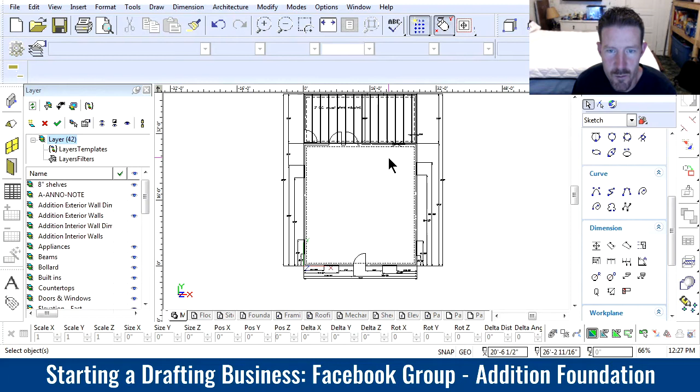All right, so we're here. We just did the foundation, and I talked about this detail. With the house, the way it exists, we need to put a stem wall for the house all the way around it, so when we move the house, it can sit on that new stem wall. The house looks like it's made of 2x6 floor joists, and we're going to put 2x10s on our addition. So we need two stem walls at the joint where the house meets the addition, and the stem wall for the addition is going to be shorter than the stem wall for the house. So I need to do a detail to show that.

So here is a detail I used on a different project, and it shows the stem wall for the house and the details of the floor joist. This will work for both the addition and the current house, except for that joint between the two. I need to put another stem wall here for the house, and maybe this is the house right here. I need to put a new stem wall for the addition, showing that. So what I'm going to do in this video is draw the detail for that.

First we're going to get the copy function, and I'm just going to copy this over so I can start working on it over here. Now I got all the stuff I need. Now all these labels, I'm going to get them out of the way, and I'll probably use them later. Notice I turned off my copy function. Let's slide them up here. Hopefully we can use those later.

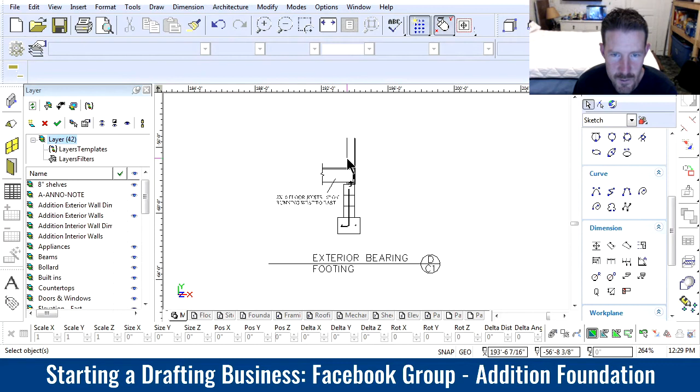Alright, so I'm going to assume that this is the house, because the house is already existing, and we're going to use that wall as part of the interior for the next thing. Now this right here, we're going to get rid of this. This is siding from the old project. What did I do? I tried to click delete, it didn't work.

Oh, come on now. Maybe it did work, I just can't see it.

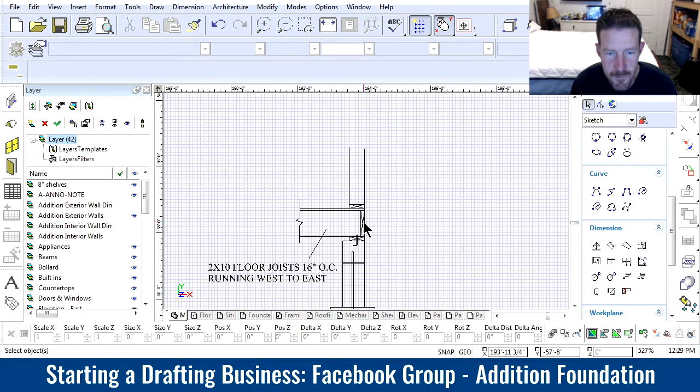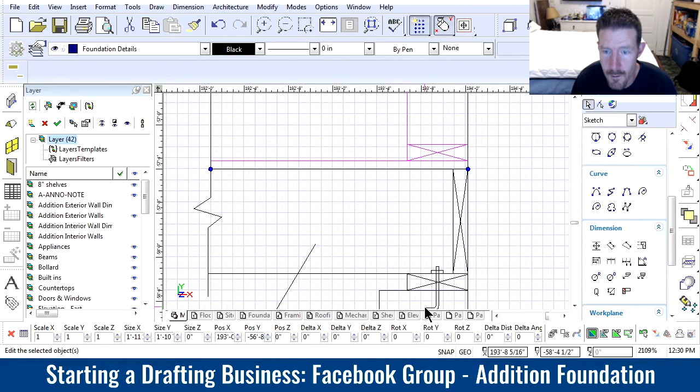Okay, now this is 2x10, we need to shrink that down. So I'm going to grab the top of this and move it down. 2x6 to 2x10, that's 4 inches, so let's just move that down 4 inches. Alright, now we take our band here and shrink that down.

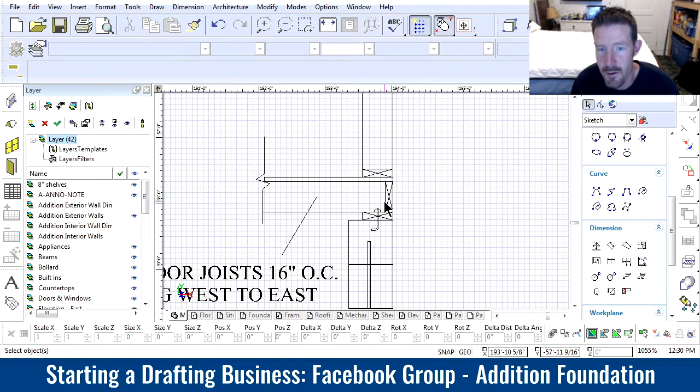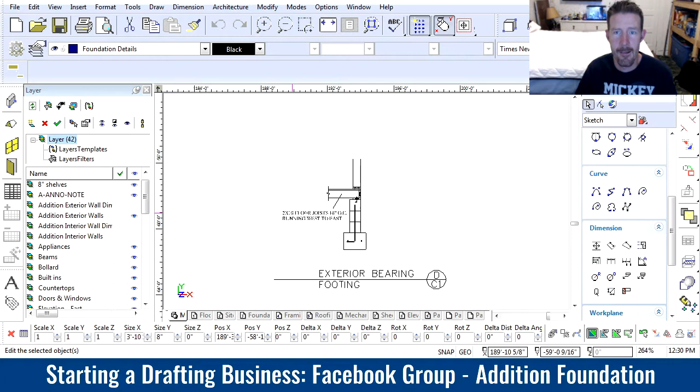This label is going to change to 2x6, and then I'm going to put existing. I want to change that, capitals. Existing. Looks like there's 16 on center. Maybe I should do that. Interesting, 16 on center.

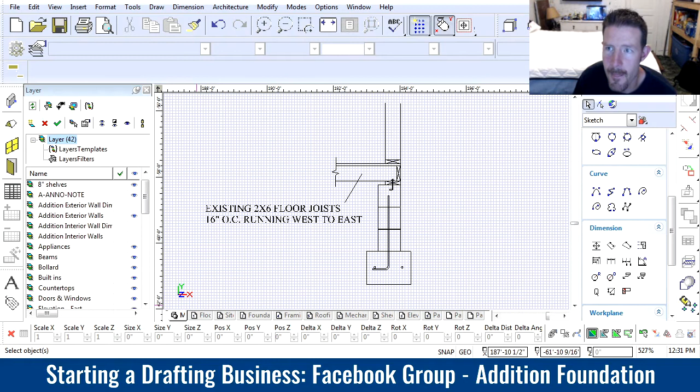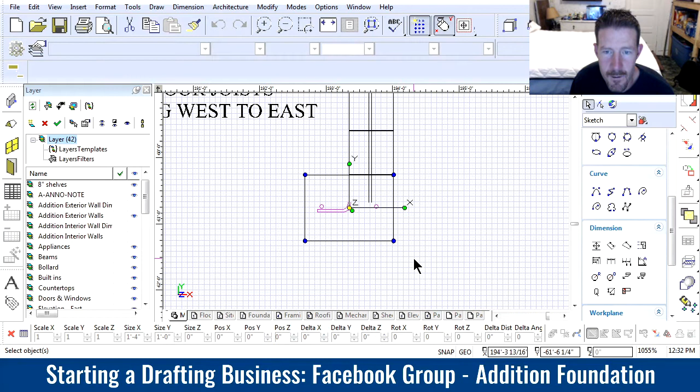All right, so now what we're going to do is copy this over. I'm actually going to slide this over too. Let's see, like this. Really? Gotta be like that, huh? Alright, so we got that. That's the rebar.

Okay, so now we're going to put another one right here next to it, a little bit shorter. So let's see, how much of this do I want? I think I'm just going to take all of this and copy it. I'm going to rotate it on the Y-axis right here, 180 degrees, see what that looks like. Rotate Y, 180. Okay, take off the copy function.

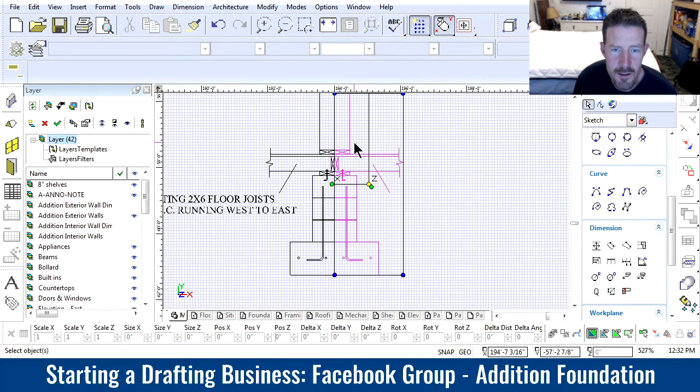Now let's slide it across, try to match it up. Okay, so that's the idea. Except here, we're not going to have this on the addition. Okay, is there an extra line in here? What is this? Get rid of that.

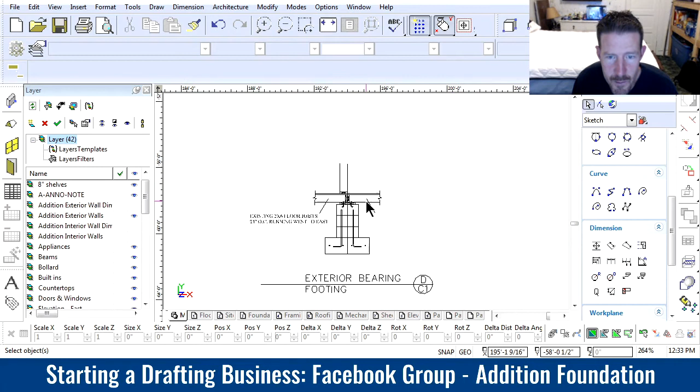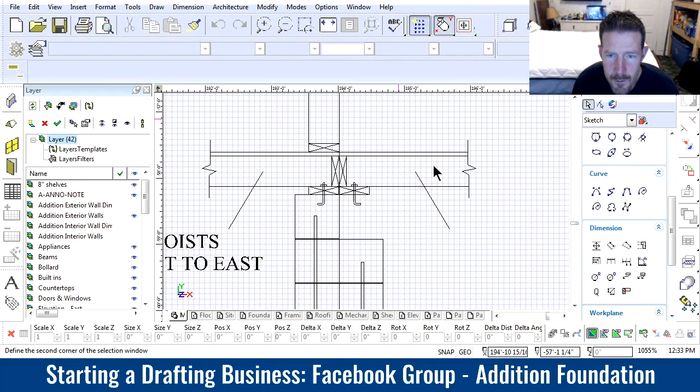Alright, so this makes sense. So this is going to be 2 by 10s though. So we need to take this brick out, shrink this down. There we go. Down in here, then this whole thing here. Oh, too much, this whole thing. I'm actually going to leave it there.

What's going on with these bricks? How big are they? 1, 2, 3, 4, 5, 6, 7, 8. 8-inch bricks.

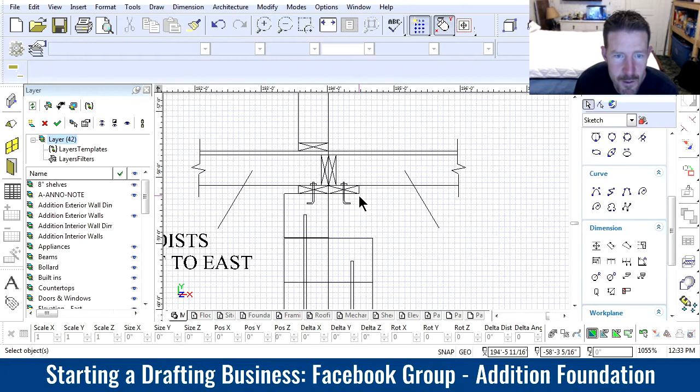That makes sense. Alright, so how are we going to do this? We're going to have to slide this up 3 inches. Delta Y, 3. Then we're going to slide this part down 5 inches.

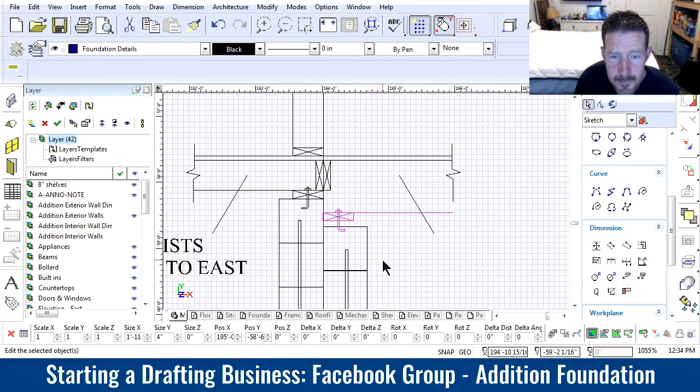2 by 6 to 2 by 10, I think that's going to be 4 inches. Alright, so that means this stuff goes up further, 1 more inch it looks like.

Oh, excuse me. 1.1. Oh, 1.1 was too much. Negative 0.1, that's too much. 0.08, that's closer. 0.01, aha. Gotcha.

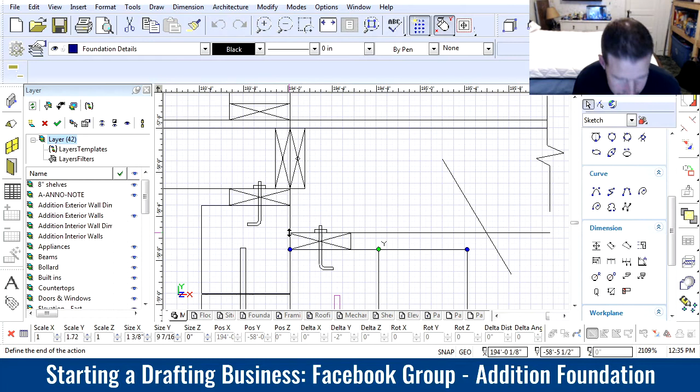Alright, so then this thing again is a 2 by 10, comes down to here. Alright, this looks good. Looking good.

Copy your label over. There we go. Take the existing out. There we go. Floor joist, 24 inches on center. And they're running north to south.

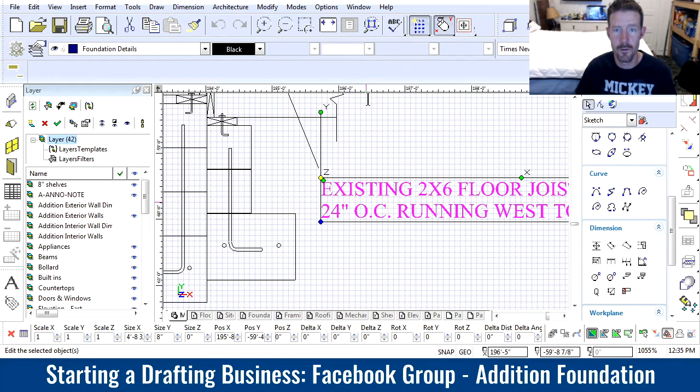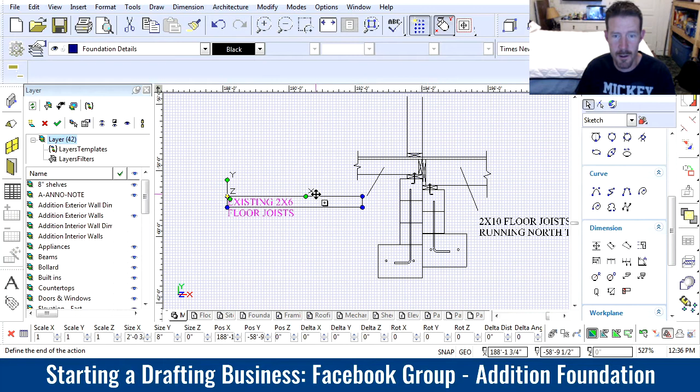Okay, good. Alright, I'm going to change this too, because I'm going to change this existing. Yeah, I'm just going to leave this part off. Existing 2 by 6 floor joists. We don't know how they're running, we don't know how far they are apart. So we're going to put what we do know there.

Okay, how are we going to do this? These are 8-inch blocks. Is this correct? This is a 12-inch footer. Yep, 12-inch footer. So from here to here, let's try that again. Here to here, 4 inches.

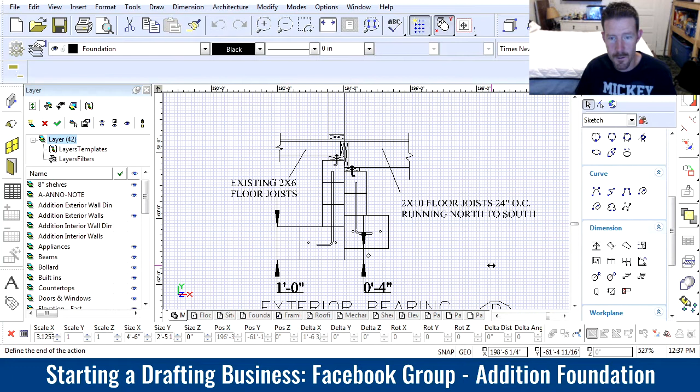Let's see. Why is that crooked? Oh, I see, that's interesting. Doesn't take much. Alright, delta x 0.1.

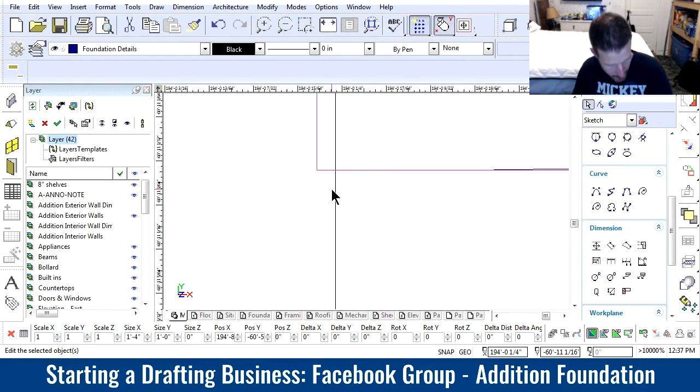Way too far. 0.005. I went up, that's funny. Delta y, 0.005. 0.001, getting closer. 0.001, too far. Negative 0.001. Okay, 0.005, perfect.

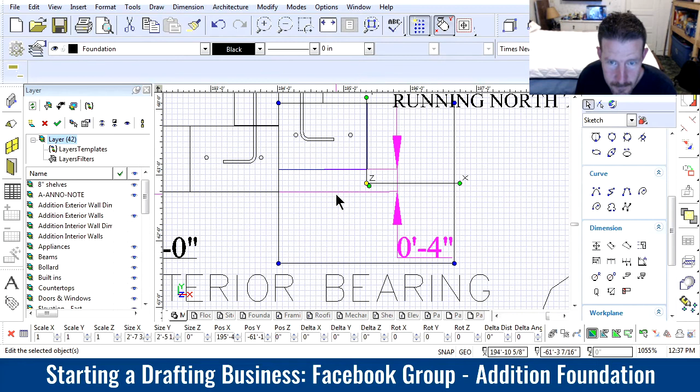Alright, now this whole thing here. Try that one more time. That's better.

So start that 4 inches higher. Take a... let's get ourselves a skilled foundation guy, he can do this right. Yep, that's good.

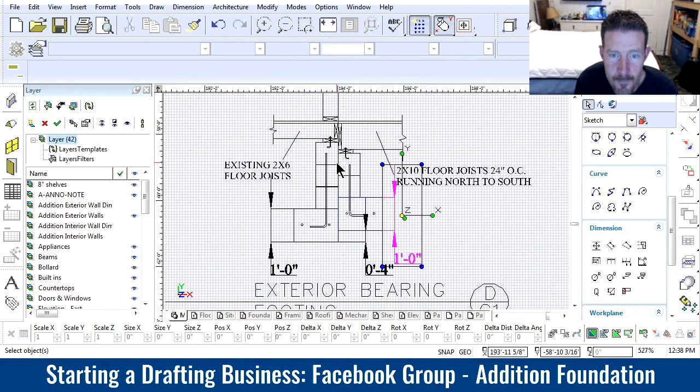Alright, so now if for some reason the addition or the existing home doesn't have this sill plate, then they can add it, and then this will be the right height. Now if for some reason the back by the kitchen is 2 by 10, then they can make this a 2 by 12 or 2 by 14 to get up there.

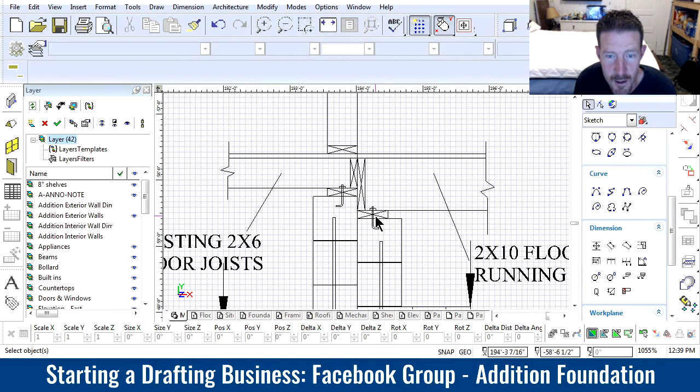They could also add an additional sill plate, maybe, if it's to code. I don't know what the code is, I don't know if you can get away with that. That way this extra 4 inches basically is going to help us get some space to make sure we get this right. I just can't believe they used 2 by 6.

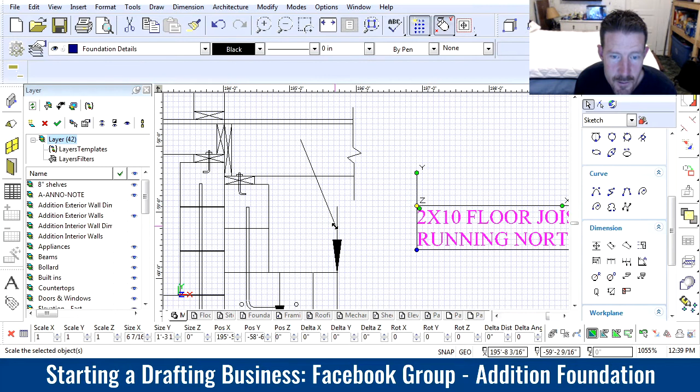It's crazy. Makes sense, old buildings do weird stuff. A lot of times they're not to code, or at least not up to current code. So this is pretty much what the detail is going to look like for moving the house and then the addition. So what do we got here?

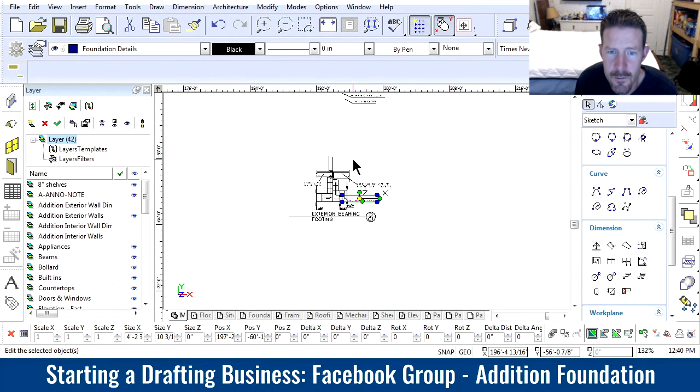Okay, continuous rebar, let's put this label on. Let's see, right here. There we go, it's this one. 16 inches by 12 inches deep footer. That's right here.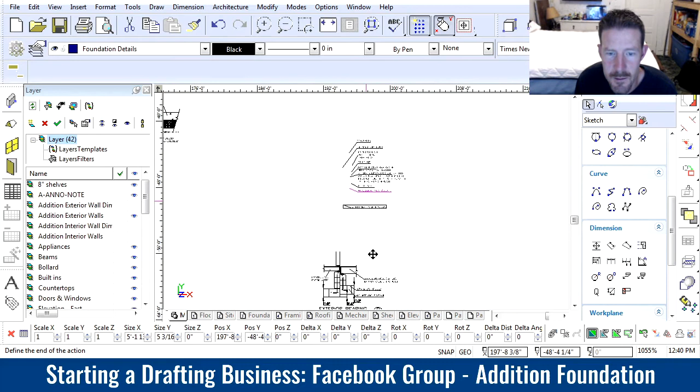What's this one? The vertical rebar. That's this one here. Oh boy, it's getting messy. Let's see if we can sneak that in here. Oh, come on.

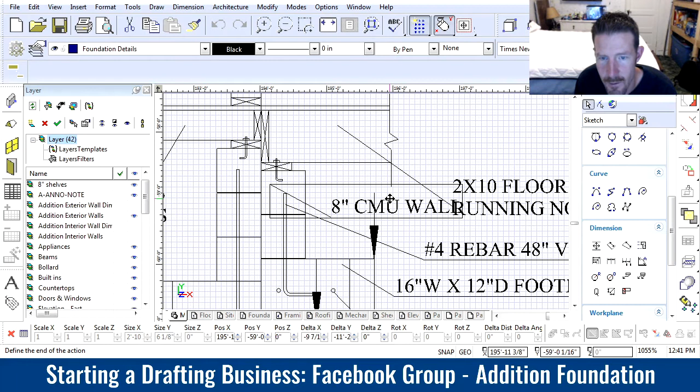There we go. And what's this one? 8-inch CMUs. I can sneak that in here. Not sure where this one is. Make sure this is... I should make sure all this is on the foundation details. Right here. I can do that when I'm done though.

Alright, what's the next one? Alright, the bolts. So this part, actually these parts, the sill plate and the bolts. So let's see if I can get the sill plate and the bolts. Oh, okay, what else is up here?

Alright, they don't show that, okay. That's down here. Tricky. Okay, I think I'm going to move this up. Put this stuff in there. Come on now. Here we go. Right about here.

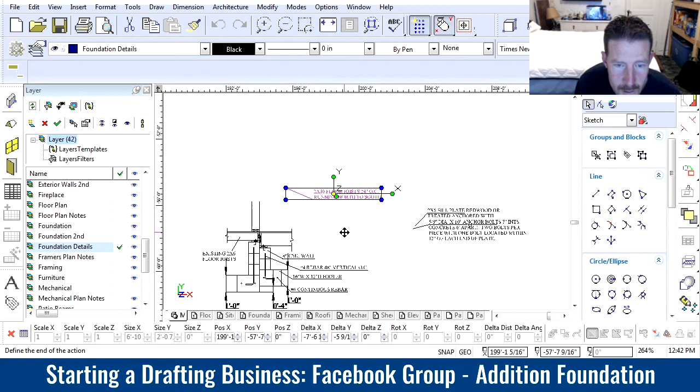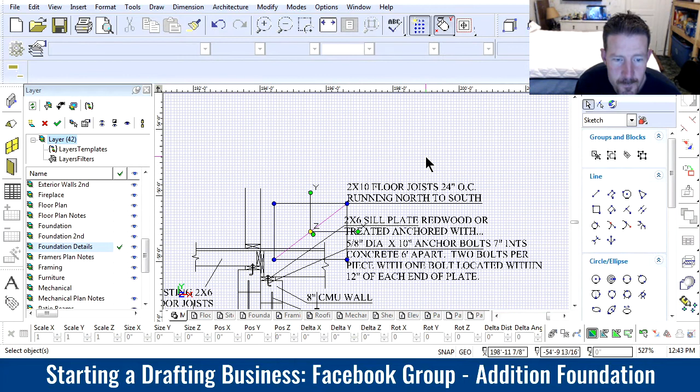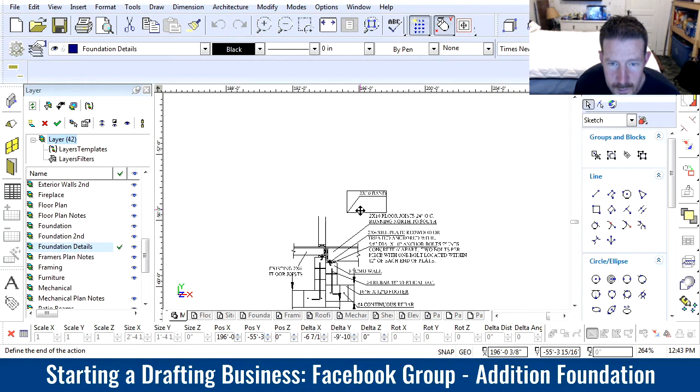This is the bolt. This is the sill plate. Alright, this is the floor joist. It's coming together. 2x10 band. Almost room. There we go.

Exterior sheathing, we're not going to have that. And plywood floor, yeah, we'll have that. So I'll get rid of this. I can put that right here. Except I have to move the band a little bit.

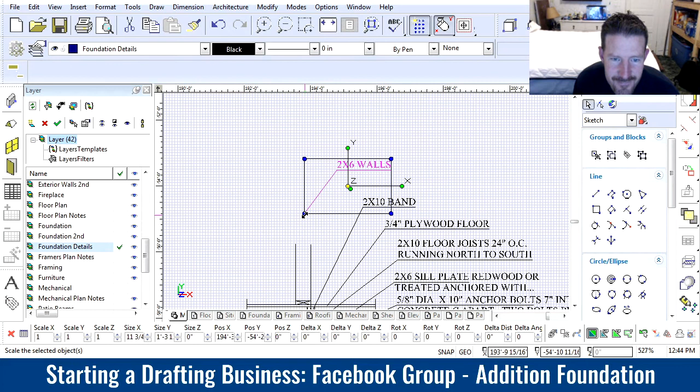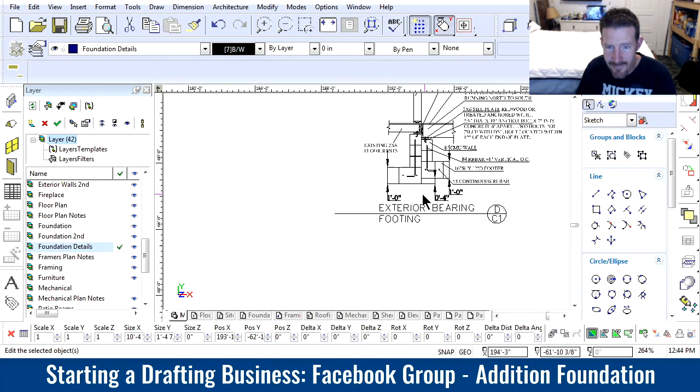We're going to put existing here. Existing 2x4 walls. Move that down a little bit. Okay, I'm going to make sure all of this is on the foundation details, just like that. Alright, so this is what the stem wall between the two, the addition and the existing, are going to look like.

Alright, now that we've drawn this up, we're going to put a label on the plan to show where it is. So first we need to change this, okay, to a 2 or something, because this is the 1. Let's see if we can find a 2. There's a 3. There's a 6. Well, let's just take this 3 here.

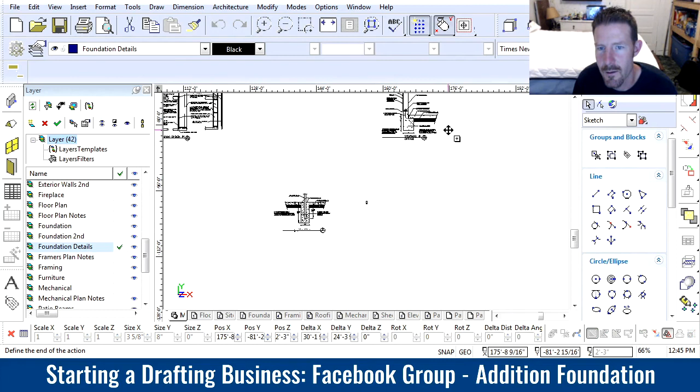No, I don't think so. Let's take this 6 over here. There we go, we'll copy that one. And here we go, make it a 2. And I'm going to change the text style to simplex so it matches the rest of it.

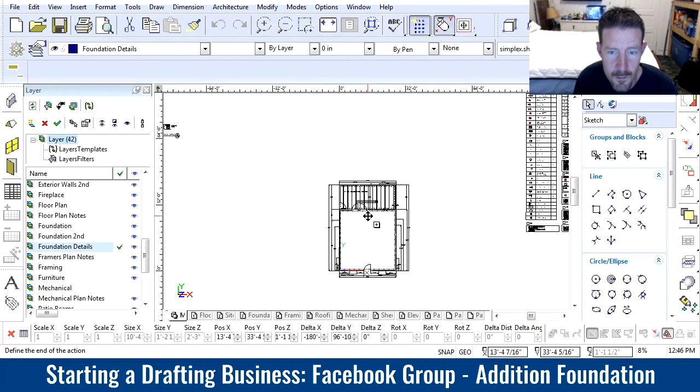This part here then I'm going to copy to the plan. There we go. This part here we're going to change, rotate Z 90 degrees. Hey, what in the world? Don't do that, it's got the circle as part of it. Okay, so let's go to our explode tool, that'll remove the circle.

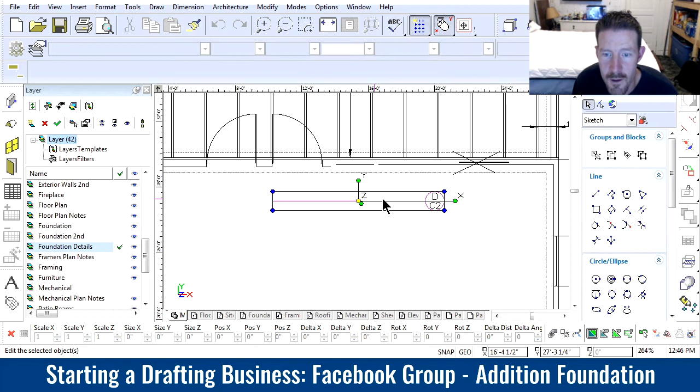Not yet, let's try again. Keep exploding it, eventually it'll give you just pieces. Apparently lots of pieces. Lots and lots of pieces. I wonder why it made so many. Alright, so we can just get rid of this stuff. Oh, come on computer, work with me here, work with me.

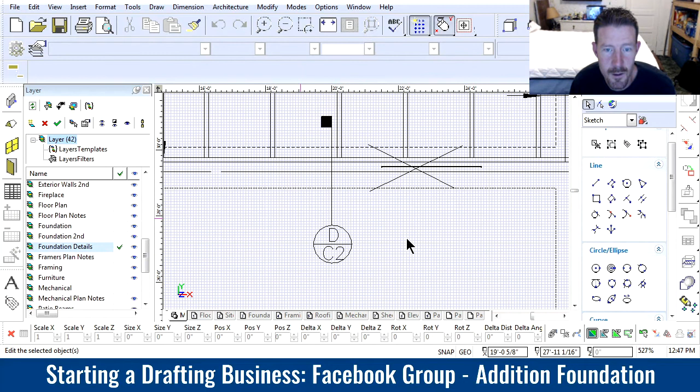Foundation details, okay. 90 degrees, we need a black box at the top. There we go. So that's C2, let's grab C1.

That line to be so big. But it's attached to the circle again. Still attached to the circle. Same thing. I wonder why it did that, it's pretty strange. That's probably fine, a little bit big.

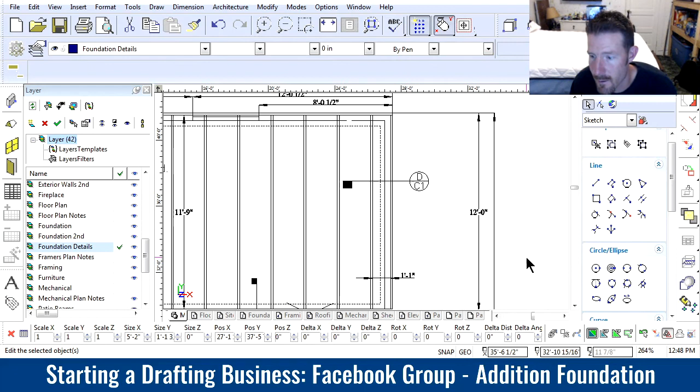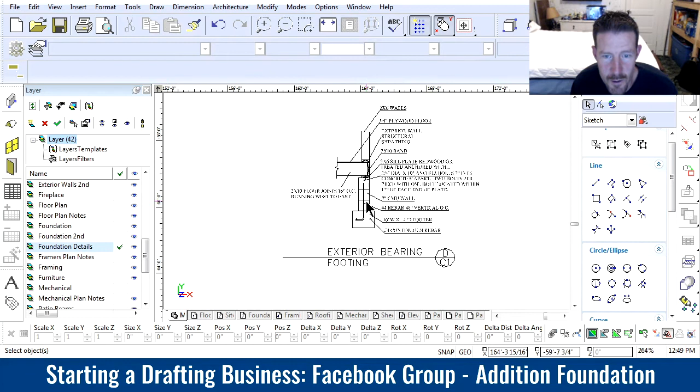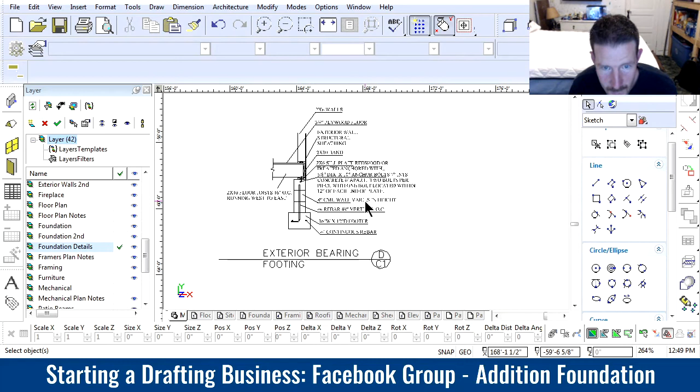Alright, just to clarify with the contractor, both the addition and that are going to have the same type of stem wall. One will be 2 bricks tall, one will be 3 bricks tall. So I'm going to put that here, varies in height. All right, perfect.

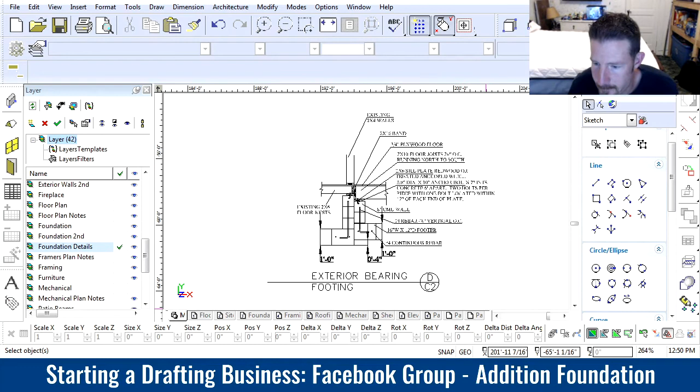All right, so that's the detail. You're going to need to draw a bunch of these, and you need to know how to build stuff. You can't just guess. And if you need help, call a friend that knows, make sure you have some contacts. All right, and remember also that this is per your code, your local code, and it'll change based off where you live. This might not fly everywhere you live. Alrighty, well good luck, all right.